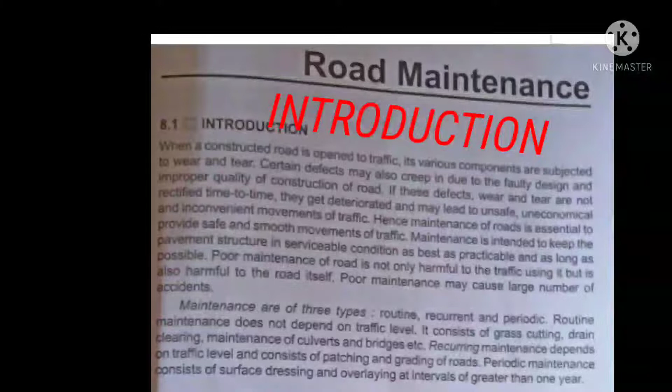Maintenance is intended to keep pavement structures in serviceable condition as best as practicable for as long as possible. Poor maintenance of road is not only harmful to the traffic using it, but also harmful to the road itself, and may cause a large number of accidents.

Maintenance is of three types: routine, recurrent and periodic. Routine maintenance does not depend on traffic level. It consists of grass cutting, drain clearing, and maintenance of culverts and bridges, etc.

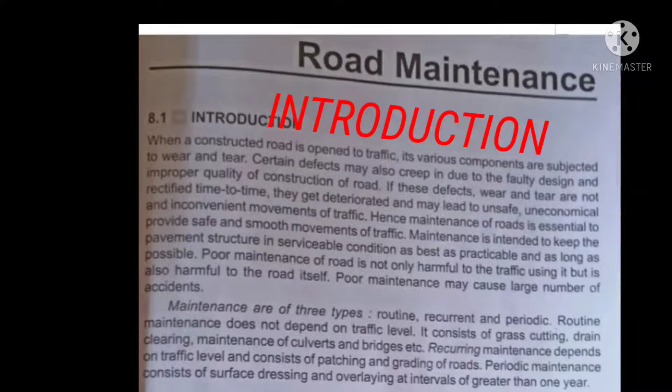Recurring maintenance depends on traffic level and consists of patching and grading of roads. Periodic maintenance consists of surface dressing and overlaying at intervals greater than 1 year.

General causes of pavement failure: the following are the causes of failure of any pavement. First, bad quality of construction material, faulty design and improper quality control of construction, inadequate road drainage systems, increase in wheel load, and settlement of fill material of embankment.

Failure of flexible pavements: the localized deformation or settlement of any one of the layers of a flexible pavement leads to failure of the entire pavement. The failure in flexible pavement may be due to subgrade failure, base course failure, or wearing course failure. First, subgrade failure.

Excessive deformation in subgrade soil is one of the main causes of pavement failure, and this type of failure causes excessive undulations, waves and corrugation in the pavement surface. As shown in the figure, the basic reasons for subgrade failure are inadequate stability due to improper compaction or presence of excessive moisture in the soil, excessive stress applications, and inadequate road drainage.

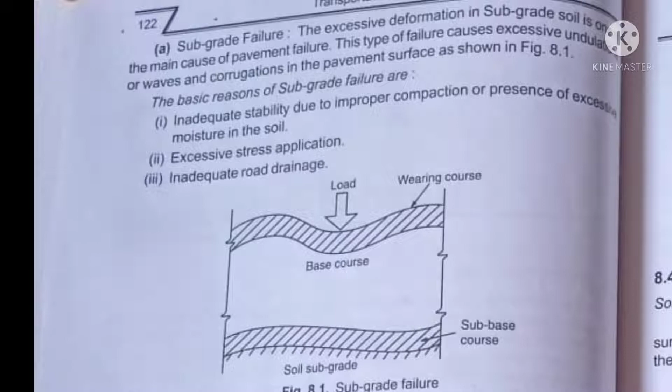Base course failure: the following are the main types of base course failure, like inadequate stability, loss of binding action, crushing of base course material, lack of lateral confinement of base course, insufficient wearing course, loss of materials from base course, and inadequate road drainage.

Wearing course failure: the failure in wearing course is mainly due to the following reasons, like lack of proper mix designs, use of inadequate quantity of binder, use of inferior quality of binder, inadequate quality control, and volatilization and oxidation of binder.

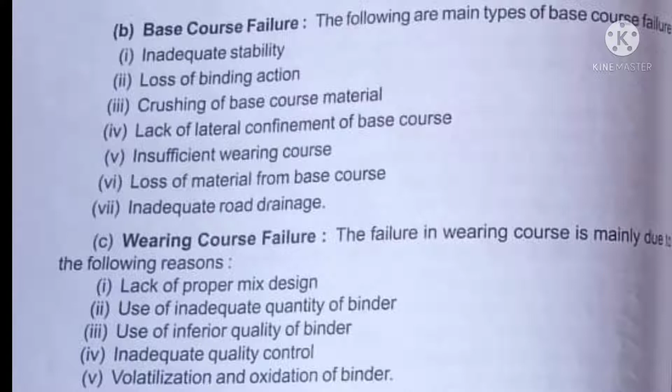Typical flexible pavement failures are mentioned below. Map cracking: this is the most common type of failure of bituminous surfacing and occurs due to local weak spots in the base course and fatigue of the materials.

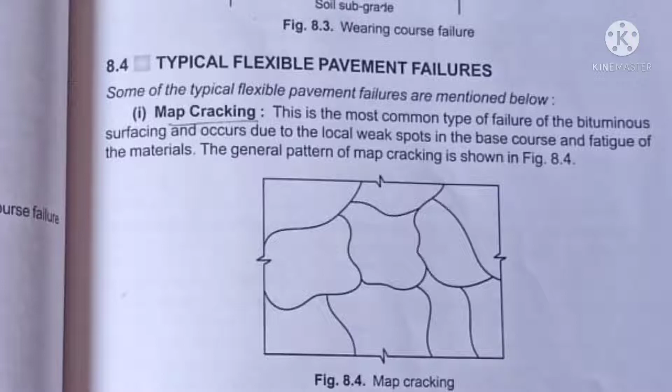Longitudinal cracking: these cracks develop along the length of the pavement. This type of pavement failure is caused due to differential volume change in subgrade, settlement of fill, sliding of side slopes, and frost action.

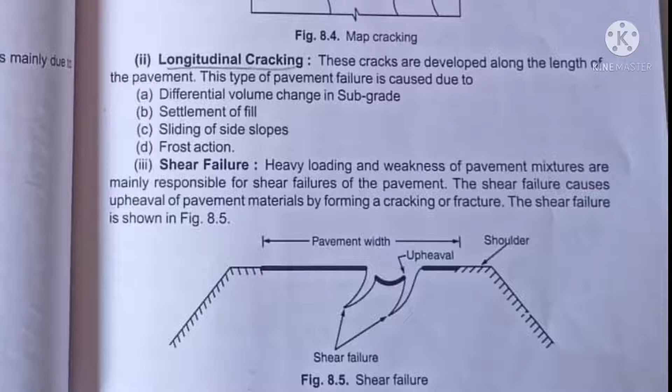Shear failure: heavy loading and weakness of pavement mixtures are mainly responsible for shear failures of the pavement. The shear failure causes upheaval of pavement materials by forming a cracking or fracture, as shown in figure 8.5.

Consolidation of pavement layers, or rutting: these are longitudinal depressions that form due to repeated application of loads on the same portions of the road, mainly due to the consolidation of one or more layers of the pavement, as shown in figure 8.6.

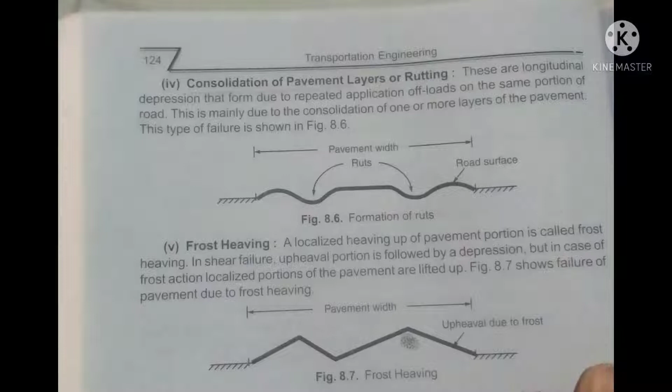Frost heaving: a localized heaving up of the pavement portion is called frost heaving. In shear failure, the upheaval portion is followed by a depression, but in case of frost action, localized portions of the pavement are lifted up. Figure 8.7 shows failure of pavement due to frost heaving.

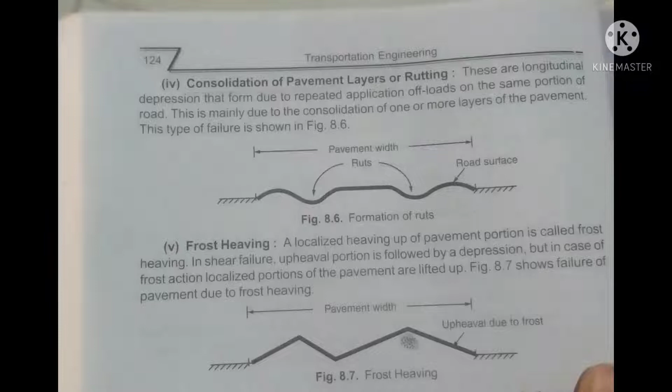Potholes: these are bowl-shaped holes of various sizes in the pavement. They are formed due to slipping of surface course materials when the surface course is not properly keyed with the underlying base course. This type of failure is more common when the prime coat between two layers is lacking. Figure 8.8 shows the formation of potholes. Pothole formation is frequent in cases where bituminous surfacing is provided over an existing soil cement base or cement concrete base.

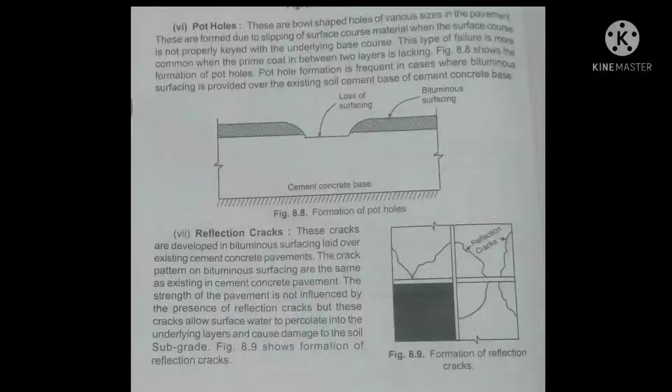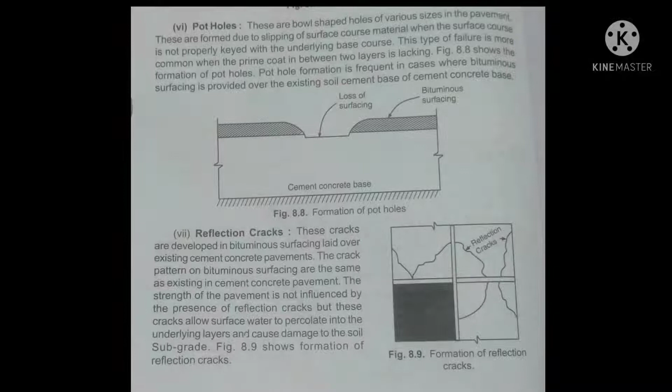Reflection cracks are developed in bituminous surfacing laid over existing cement concrete pavements, and the crack pattern on bituminous surfacing is the same as existing in the cement concrete pavement below. Figure 8.9 shows formation of reflection cracks.

Failure in cement concrete pavements. The following are the main causes of failure of cement concrete roads: poor quality of materials used in the mix, poor workmanship during construction, poor joint filler and sealer material used, inadequate pavement thickness, incorrect spacing of joints, inadequate subgrade support due to poor subgrade soil, and inadequate curing.

The various defects that creep in due to the above are poor riding surface, spalling of joints, cracking of slab corners, development of shrinkage cracks, mud pumping, widening of joints, and settlement of slabs.

Typical failures of rigid or cement concrete pavements. Some of the typical failures of rigid pavements are as follows: scaling of cement concrete, structural cracks, mud pumping, shrinkage cracks, warping cracks, and spalling of joints.

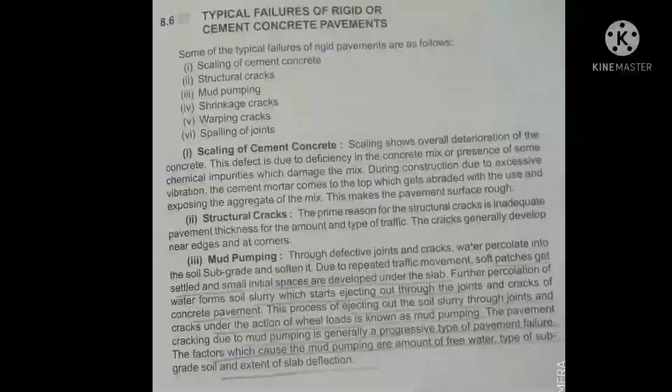So first, what is scaling of cement concrete? Scaling shows overall deterioration of the concrete, and this defect is due to deficiency in the concrete mix or presence of chemical impurities which damage the mix. During construction, due to excessive vibration, the cement mortar comes to the top, which gets abraded with use, exposing the aggregate of the mix and making the pavement surface rough.

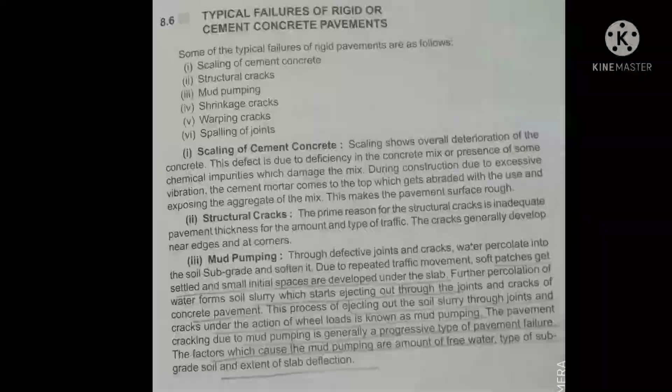Next, number two, structural cracks. The prime reason for structural cracks is inadequate pavement thickness for the amount and type of traffic. These cracks generally develop near edges and at corners.

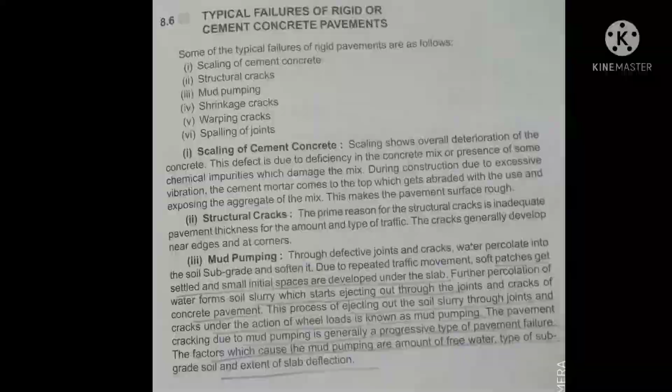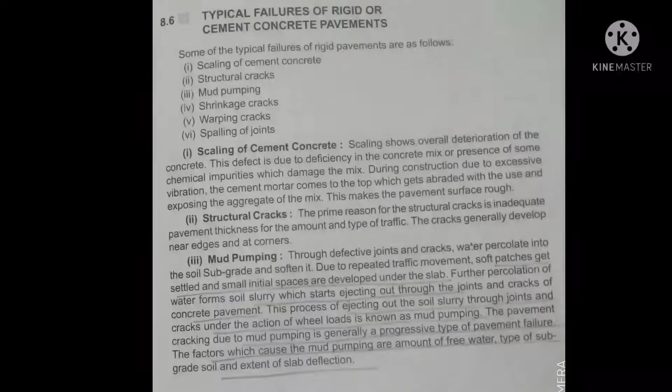Third, mud pumping. So what is mud pumping? Through defective joints and cracks, water percolates into the soil subgrade and softens it. Due to repeated traffic movement, soft patches get settled and small initial spaces are developed under the slabs. Further percolation of water forms soil slurry which starts ejecting out through the joints and cracks of concrete pavements. This process of ejecting out the soil slurry through joints and cracks under the action of wheel loads is known as mud pumping. The pavement cracking due to mud pumping is generally a progressive type of pavement failure.

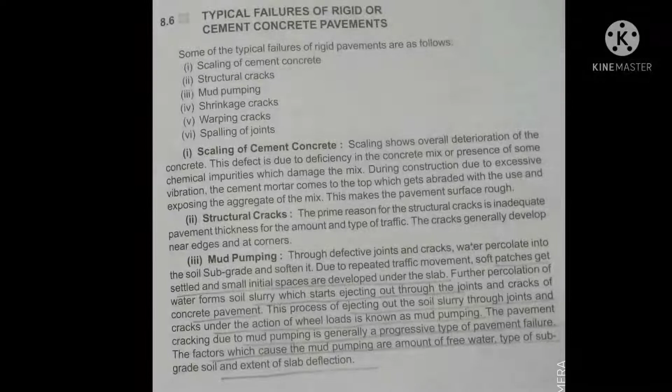The factors which cause mud pumping are the amount of free water, type of sub-grade soil, and extent of slab deflection. Shrinkage cracks are developed in the concrete pavement due to inadequate curing after laying of the slab, and these cracks develop in both longitudinal and transverse directions.

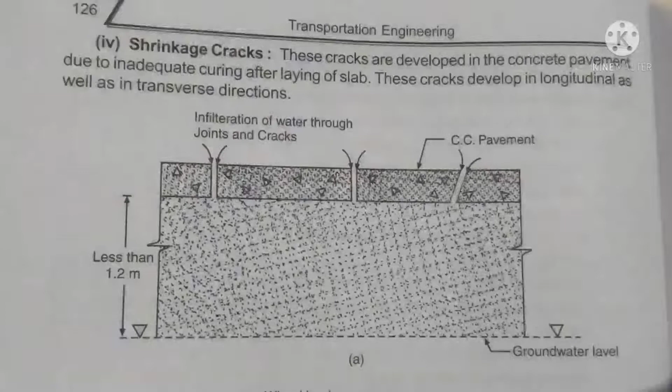Warping cracks. If the joints of concrete pavements are not designed to accommodate the warping of slabs at the edges, excessive stresses are developed resulting in cracking at the edges in an irregular pattern. These cracks do not cause any structural defect if proper reinforcement is provided in the longitudinal and transverse joints.

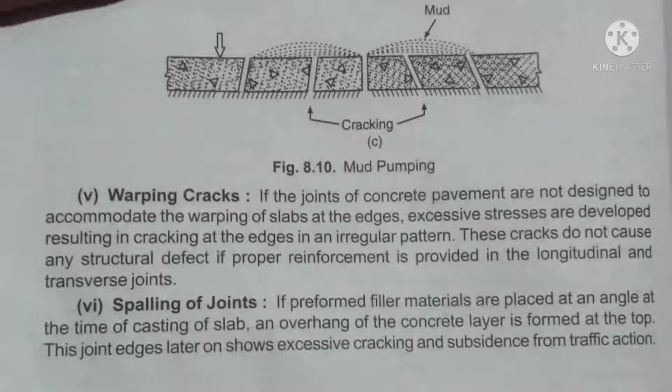Spalling of joints. If preformed filler materials are placed at an angle at the time of casting of slabs, an overhang of the concrete layer is formed at the top, and these joint edges later show excessive cracking and subsidence from traffic action.

Maintenance of bituminous roads. The maintenance works of bituminous road consist of patch repairing work, surface treatment, and resurfacing.

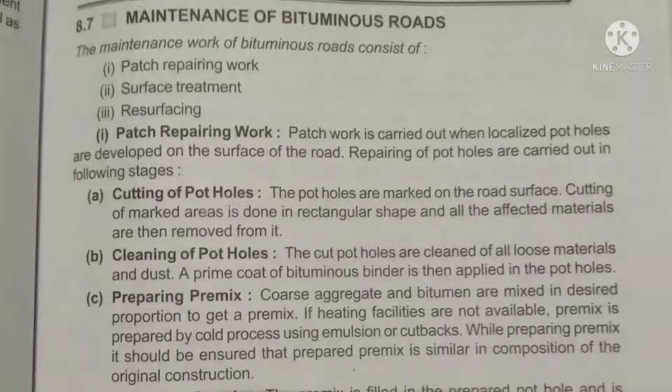Patch repairing work is carried out when localized potholes are developed in the surface of the road, and repairing of potholes is carried out in the following stages: first, cutting of potholes, then cleaning the potholes, then preparing premix, and then filling the premix.

Then surface treatment. So what is surface treatment? A bituminous pavement becomes slippery and patchy due to the bleeding of excess bitumen used during construction in the surface course. Defects like rutting, shoving and corrugations develop in such pavement surfaces, and this trouble can be rectified by spreading blotting materials like aggregate chips of maximum 10mm size or coarse sand. Rolling is also done to develop a permanent bond between the existing surface and new materials, and the binders in the bituminous surfaces also get oxidized due to aging, developing minute cracks in the pavement surfaces.

Such surfaces can be rectified by applying a renewal coat or seal coat. If the damage to the surface due to oxidation or volatilization of binder is considerable, more than one layer of surface treatment may be applied.

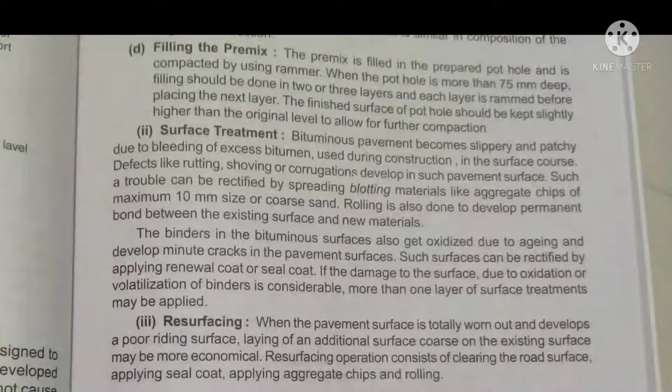Resurfacing. When the pavement surface is totally worn out and develops a poor riding surface, laying an additional surface course on the existing surface may be more economical. Resurfacing operations consist of clearing the road surface, applying the seal coat, applying aggregate chips, and rolling.

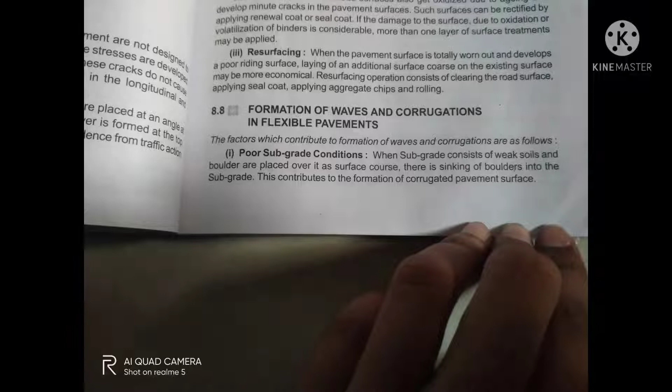Formation of waves and corrugation in flexible pavements. How are waves and corrugations formed in flexible pavements? Causes include poor subgrade condition, poor mix, defective rolling, and unstable underlying layers. There are many types of remedial measures for waves and corrugations.

Once waves and corrugations are developed in the road surface, there is no way to improve it unless another layer of surface course is provided after laying a leveling course.

But these defects creep in again if the basic reasons are not properly investigated and proper remedial measures are not taken. If the failure is due to weak subgrade soil, stabilization of the subgrade soil is done to improve its strength characteristics.

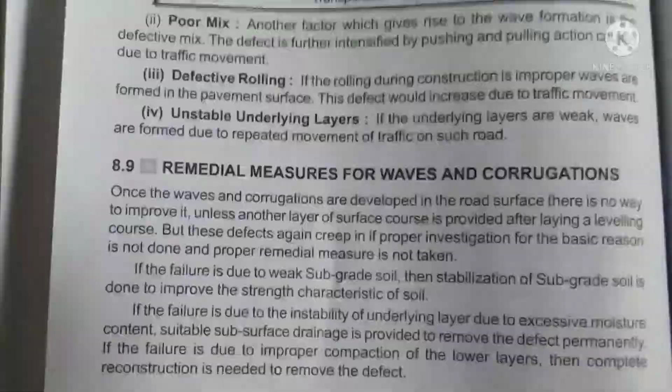If the failure is due to instability of the underlying layer caused by excessive moisture content, suitable subsurface drainage is provided to remove the defect permanently.

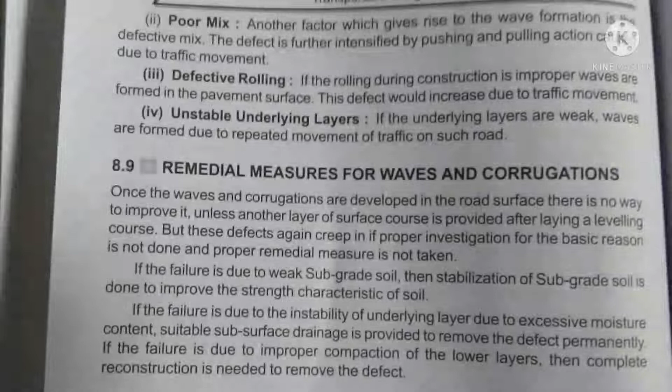If the failure is due to improper compaction of the lower layers, complete reconstruction is needed to remove the defect. Maintenance of cement concrete roads - so how are cement concrete roads maintained?

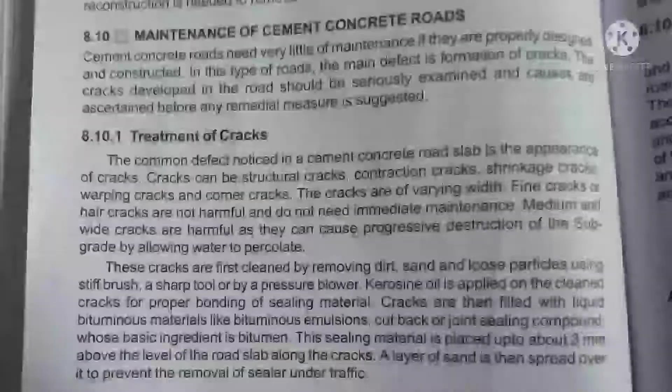First, cement concrete roads need very little maintenance if they are properly designed and constructed. In this type of road, the main defect is the formation of cracks. Cracks developed in the road should be seriously examined and their causes ascertained before any remedial measures are suggested.

Treatment of cracks - how are cracks treated? The common defect noticed in cement concrete road slabs is the appearance of cracks, and these can be structural cracks, contraction cracks, shrinkage cracks, warping cracks, and corner cracks.

The cracks are of varying width. Fine cracks or hair cracks are not harmful and do not need immediate maintenance.

Medium and wide cracks are harmful as they can cause progressive destruction of the subgrade by allowing water to percolate. These cracks are first cleaned by removing dirt, sand and loose particles using a stiff brush, a sharp tool, or a pressure blower.

Kerosene oil is applied on the cleaned cracks for proper bonding of the sealing material. Cracks are then filled with liquid bituminous materials like bituminous emulsions, cutbacks, or joint sealing compound, whose basic ingredient is bitumen.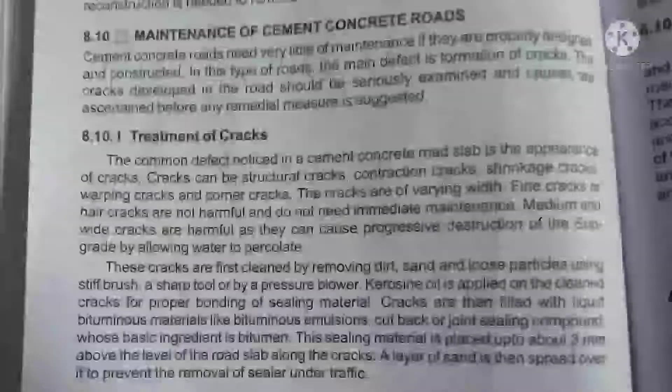This sealing material is placed up to about 3 mm above the level of the road slab along the cracks. A layer of sand is then spread over it to prevent removal of the sealer under traffic.

Maintenance of joints. The weakest parts of cement concrete pavements are the joints, and most failures in cement concrete pavements are observed at or near the joints.

Therefore, periodic inspection is done to see that the filler and sealer materials used in the joints are intact. During summer, the sealer material is squeezed out of the joints due to expansion of the CC slabs.

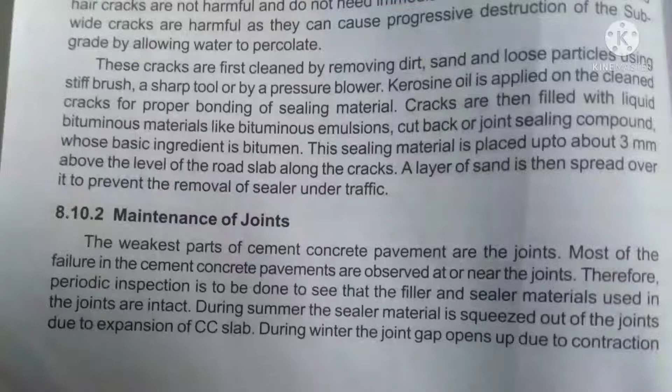During winter, the joint gaps open up due to contraction of the CC slab, and these opened-up joints are cleaned properly and refilled with joint sealer material.

After several years of pavement life, the joint filler material at expansion joints may get damaged. This damaged and deteriorated filler and sealer material is removed from the joints, and the joints are then cleaned.

Fresh filler material is placed, and the top is then sealed with sealer material. The best time to carry out this type of maintenance is the winter season.

Maintenance of shoulders. Shoulders give lateral support to the pavement and provide room for vehicles when crossing and overtaking on narrow pavement. If shoulders are not properly maintained, damage may occur to the pavement as well as to the vehicles using the road.

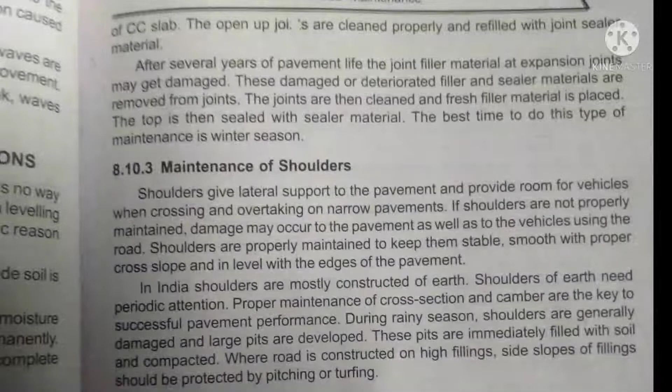Shoulders are properly maintained to keep them stable, smooth, with proper cross slope and in level with the edges of the pavement. In India, shoulders are mostly constructed of earth.

Earth shoulders need periodic attention, and proper maintenance of cross sections and cambers is key to successful pavement performance. During the rainy season, shoulders are generally damaged and large pits are developed.

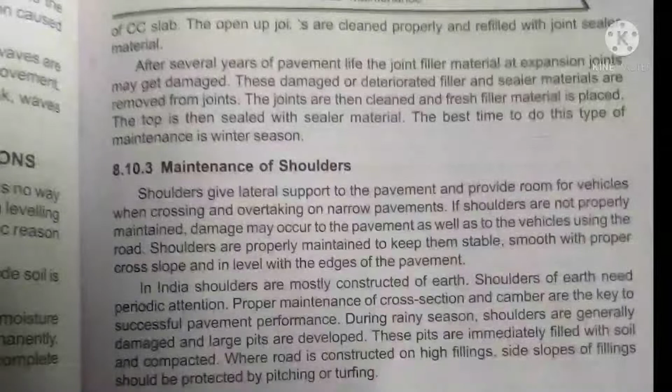These pits are immediately filled with soil and compacted where the road is constructed on high filling. Side slopes of filling should be protected by pitching or turfing.

Maintenance of traffic control devices. The main object of providing traffic control devices is to provide safe, convenient, and economical movement of vehicles and persons on the road. Generally, road signs, markings, traffic signals, and traffic islands are used as traffic control devices.

Periodic maintenance of these devices is very essential to avoid accidents. Maintenance of road signs and road markings is done by painting them as and when required for proper visibility of these markings and signs.

For maintenance of traffic signals, the traffic signal lights are cleaned from time to time to remove dust, and any defects in the light system are rectified.

Painting and repairing of traffic islands are carried out as part of their maintenance work.